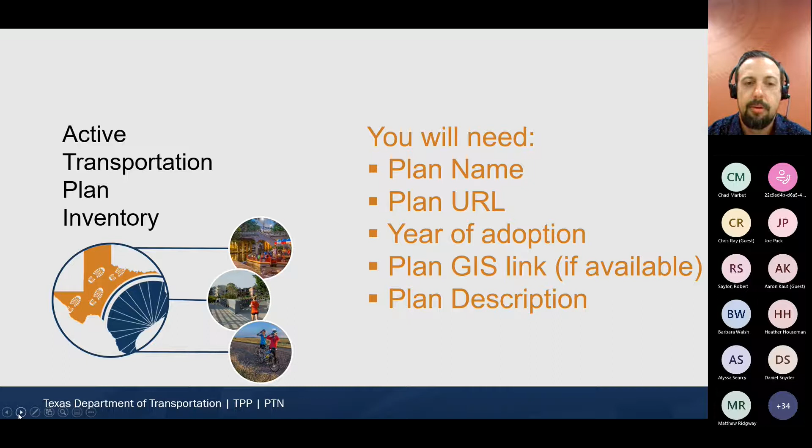All right, moving on to our first presenter. The North Texas region is home to many colleges and universities, both big and small, and they are important trip generators to the communities served by members of BPAC. How can colleges and universities improve bicycling and walking on campus, and how can agencies partner with them to coordinate active transportation to the campus? The first presentation will be provided by Gary Koch and Ian Siemens with the University of Texas at Dallas, which is located in Richardson. All right, turn it over to y'all.

Hello, thank you for having me. My name is Gary Koch. I'm the Director of Sustainability at UT Dallas, and my role here is to really set the stage for Ian, who is an eco rep in the Office of Sustainability, and is our leader for our bicycle-friendly university efforts at UTD.

To set the stage, though, I'd like to briefly define sustainability and what that means in higher education. Our office's scope of work is operational, so we report through facilities and economic development. That gives us some direct influence over infrastructure related to cycling and pedestrians. But our scope of work is also academic.

We work with the provost office on curriculum, research office for research, student affairs for student engagement. We have several roles as leaders in our community for sustainability. And then we work with faculty for our sustainability committee on policy issues.

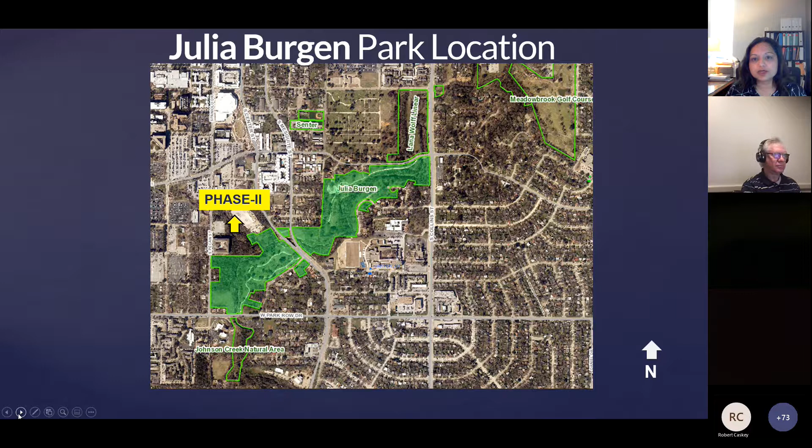Our long-term goal was to provide an enhanced hike and bikeway system that would extend along Johnson Creek Linear Park, but also draw connections into adjacent residential neighborhoods and the university campus, allowing students and staff an alternative mode of transportation while also providing recreational opportunities.

This is a park master plan, and we had to phase it into multiple phases. Phase 1 development included building a parking lot in the center of the graphic, with a playground area for multiple age groups, ages 2 through 5 and 5 through 12, several benches, a pavilion, drinking fountain, and bike rack. A portion of the hike and bike trail system was also developed as part of phase 1.

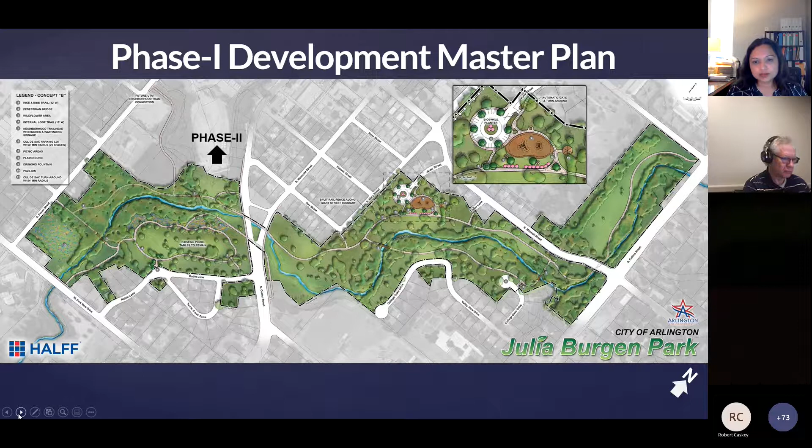During phase 1 development, we were able to construct connections into and connecting to the existing sidewalk system, making it really easy for people to walk to the park if they wanted to. In places where sidewalks were missing, we did a separate program through our Public Works Department, incorporating additional sidewalk connections so people could walk to and connect with the park system here. Next slide, please.

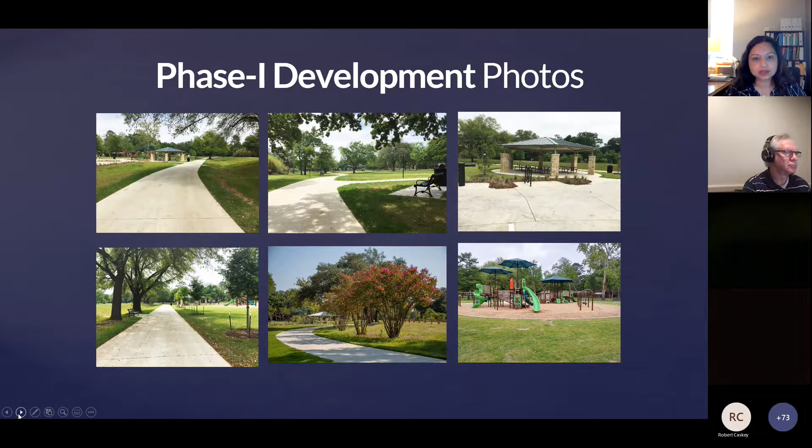Now I want to talk about phase 2 development, which is what we are currently executing. Phase 1 completed significant portions of the trail system, but we still had a few other sections that remain to be completed.

While we were in the design process, we discovered that there were several portions within the park boundary that were designated as ecosystem restoration areas. We did not want to disturb the natural habitat, wildlife, and ecosystems within those park regions. So we had to think about alternative solutions to continue providing our off-street bikeway, hike and bike pathway connections that we had originally planned in the master plan.

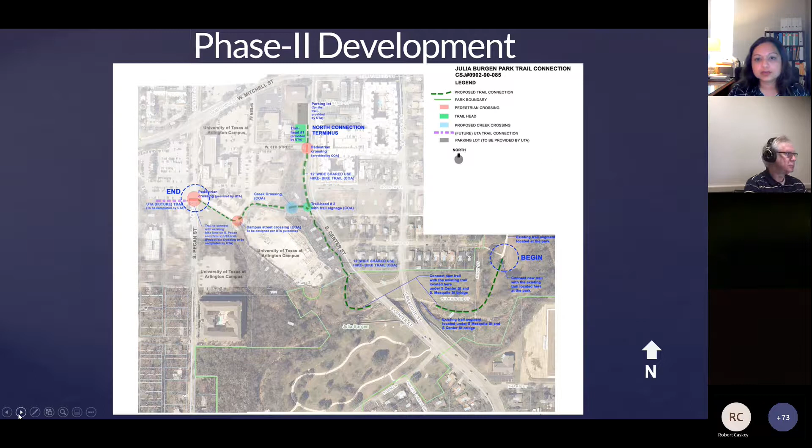So that gives you a quick outline of where we are at. This project is funded through a TAP grant, and we've been working diligently with COG and TxDOT to continue moving this project forward. We are at 90% engineering and design, and we've achieved environmental clearance on this project. There are some utilities and right-of-way clearances we're currently working on, anticipating completing those this fall, and also looking at letting the project in December or early next year.

That would allow us to begin construction sometime in spring next year, running through an anticipated 1-year-long project. Once complete, that would allow us to connect significant portions of not only the linear park trail system, but also allow the parks to be connected—linking residential areas, the campus, and the existing bike lane on South Pecan Street, which would be a major accomplishment as part of this master plan development.

As I mentioned, we are now in our last phase of completing the easement acquisition efforts with the University of Texas at Arlington to complete this, and we are continuing and very hopeful that we can make this happen within the next few weeks. Having said that, next slide, please. I'm open to any questions.

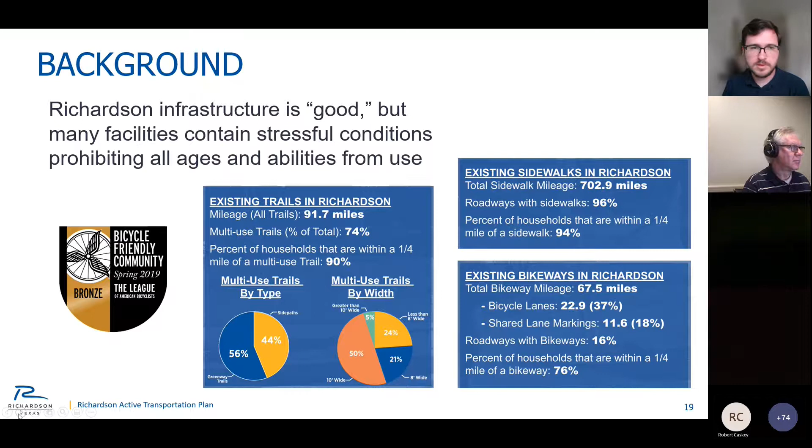It's about a 1-year schedule for us, where the goal is by the end of this year, maybe early January, we'll be able to wrap up with a final report and go to council. So we have a little ways to go, but a lot of progress so far.

We have a lot of public engagement and surveys and events coming up this month for Bike Month, and then we'll kind of wrap that up beginning of June.

Going into some of that needs analysis, we have a few different pieces where Toole Design is really running a lot of our analysis components. One of them is trip potential, and they've been looking at our residential areas and how they connect to parks and schools, transit facilities, and retail.

One thing we're really not looking at is the home-to-work trip as far as bike commuting. Our biggest focus is really looking at other things within the neighborhoods, whether it's going to school, going to parks, or connecting to our neighborhood retail and restaurants. The other focus, with the Red Line and future Silver Line coming in, is really connecting our residential areas to our major transit facilities in the city.

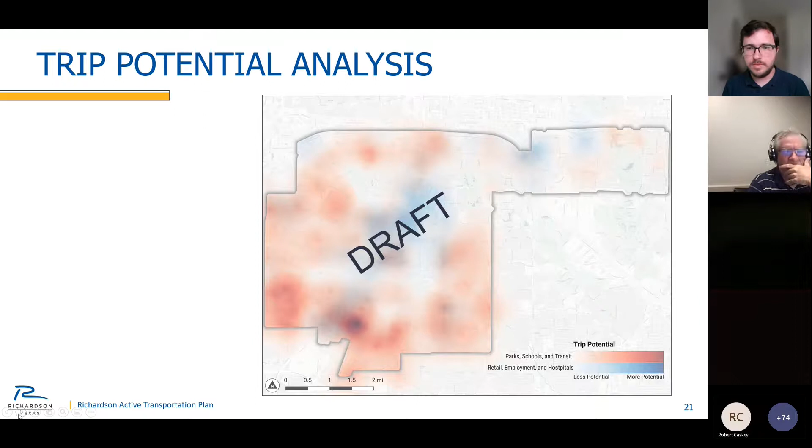Then our next analysis, on the next slide, is our pedestrian level of traffic stress. We analyzed our different crossings, whether signalized intersections, unsignalized intersections, or mid-block crossings with trails, evaluating them based on a few different measures of what's considered high stress versus low stress.

Even further, you start looking at a lot of our major arterials as major barriers, where they're all high stress crossings. We have so many six-lane arterials that you end up crossing between through lanes, left turn lanes, and right lanes, ending up crossing 7, 8, or 9 lanes to get to a signal.

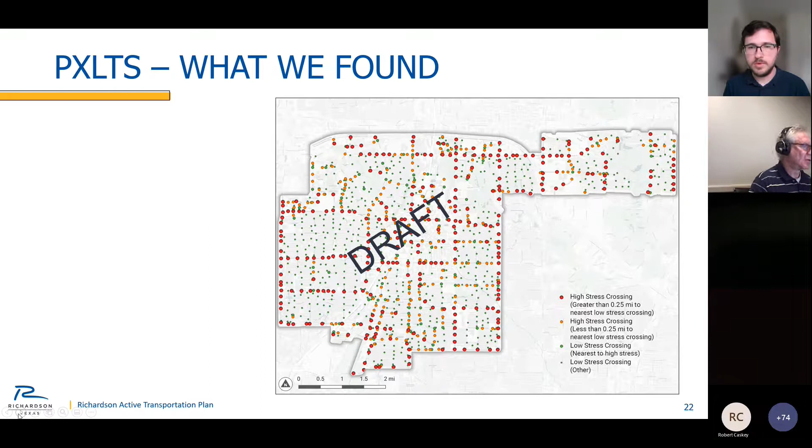So we're trying to look at where we can focus on creating low stress crossings so people aren't trapped in their neighborhoods. On the next slide, going through some analysis, you start seeing that arterial network where, north-south on Plano Road or Jupiter Road, or east-west on Campbell Road or Arapaho Road, we have large segments of the city that end up getting trapped in your one-mile arterial grid.

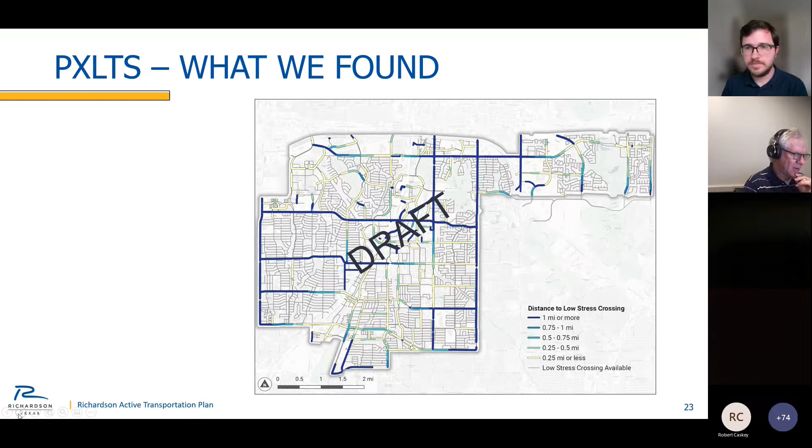This is just because there really are no comfortable, safe crossings where you think of someone with kids, or someone who's less comfortable walking or biking, getting to this area and not being able to make those crossings or feel comfortable. So that'll be another push on how we look at and find recommendations to make more comfortable crossings in the city, to really expand those boundaries so you don't just get trapped in by our arterials.

And then the next slide, we continue some of the analysis with our bicycle level of traffic stress, looking at low stress versus high stress. The low stress, shown in blue, is all your local streets, but then in red you see those higher level, higher speed arterial facilities. So we're looking at how we can create a network of low stress bike facilities. I think that's about the end of it.

We've got one more analysis we're looking at, which is kind of an equity analysis or vulnerable population analysis. That's in draft form also, where we're trying to identify the areas we need to focus on with additional consideration as well as outreach. It's an area the city hasn't looked at in the past quite as much, but we're trying to figure out how we can integrate that into this plan, creating facilities for everyone.

I think we may have a few minutes, a minute or two, for questions if anyone has anything.

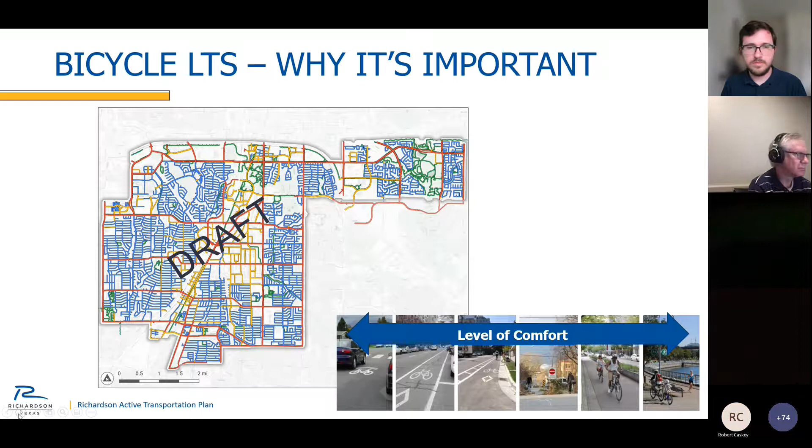Next up, the Association of Pedestrian and Bicycle Professionals, or APBP, is a professional organization focused on advancing active transportation through policy, design, and education among members. Continuing with the next presentation, we have Daniel Herrig and Brendan Yarbrough with Kimley Horn.

Thanks, Robert. I'll continue here, and then hand it over to Brendan. As he and I have both mentioned, we're both members nationally of the Association of Pedestrian Bicycle Professionals, but within North Texas, the DFW area, there's no local chapter—even within Texas, there's not a local chapter. So the discussion is to see if there's interest in continuing this regional BPAC conversation into an APBP DFW chapter, where anyone interested in walking and biking can further that discussion.

If you go to the next slide, the objective of APBP is making walkable and bikeable places—sharing knowledge and expertise throughout the environment. From DFW, we have a lot of things we may not be able to do like Portland, or the West Coast, or East Coast can. I think we have a different context here, so it'd be great to get feedback and conversation from people in the region, as well as across expertise—planning, engineering, urban design, landscape architecture, public health, advocates—getting everyone in there to have conversations and share lessons learned.

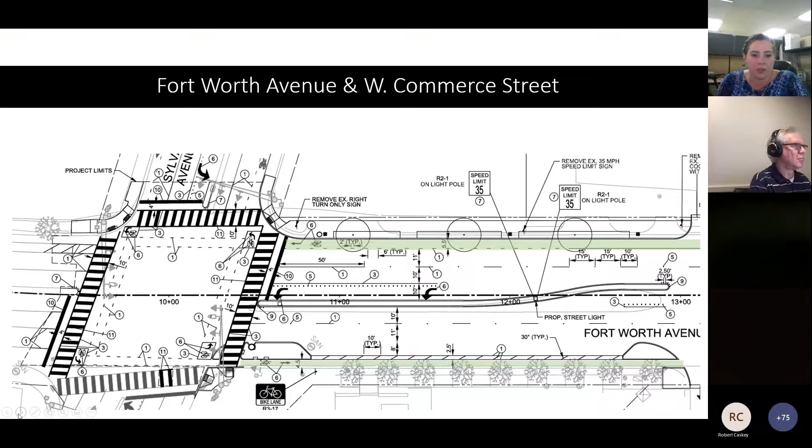The bump outs include rain gardens or vegetated areas that differ throughout the corridor. Right here is a rain garden, and there's actually inlets just further cut off in the picture. This one you're seeing here is a rain garden that filters water, along with all those great low impact development features. One thing I do want to say is that we've had pretty good compliance with vehicles remaining in the parking lane and not crossing over into the bike lane. In this section, we have enough space to have that buffer between the car and the bike lane.

So this section is really comfortable to ride and seemingly usable by the community. To the right in the picture is a shopping area, so these are people not only that live in the community and know how to use it, but guests and visitors who have never really been here before. Seems pretty intuitive, so we'll call that a win. Something we have identified is the need for maintenance agreements to be very clearly outlined from the beginning. We're fortunate with this project to have champions, which actually got this project into the bond back in '17, but we really need to make sure those maintenance agreements are in place so these places can stay looking beautiful as intended.

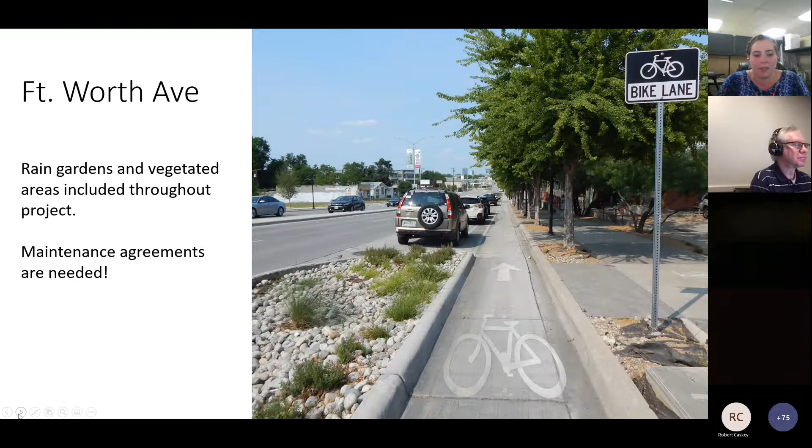Here's another angle of that exact intersection. We do have that kind of more protected crosswalk and the bike lane that's continuous, like I said, to the west or left in this picture.

This project did not go in completely smoothly. Of course, we had to run into some problems. In this location, we were limited with our right-of-way. The project limits actually stopped at a match line in the plan set, so we didn't get all the way to the next block and end seamlessly. On the left side of this picture, which is really the north side of the project, that development will be redeveloped, which would give us the opportunity in the future to actually fully adjust the median that is currently in the middle of the street.

As you can see here, we had to do some field engineering, and really there's no buffer space between where the cars can park and the bike lane. So in the future, we're looking to push this out and give actual space to the cyclists. You can still bike through this corridor, even with large trucks and their big dually mirrors hanging out into the bike lane. It's still passable, but can be improved in the future.

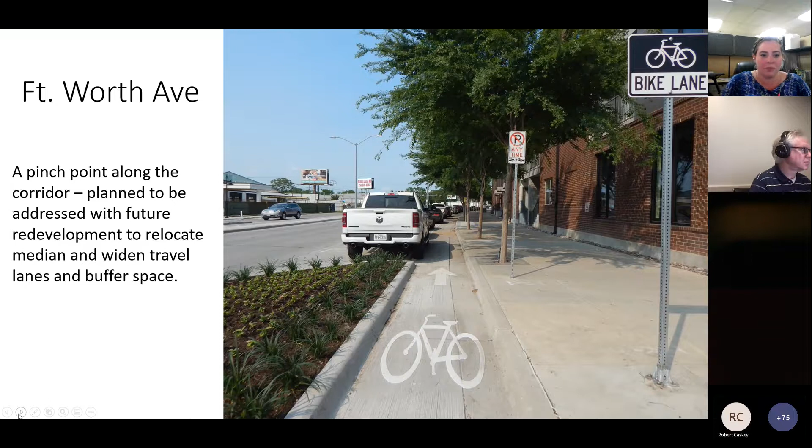That bump out you saw is maintained by the apartment complex adjacent to it, so a couple of the locations are being maintained actively by nearby property owners. As we continue down the street, it really opens up, and we're just using the flex posts in the buffer space for the bike lane.

At the intersection of Beckley, this is another location where it's crossing existing facilities. Those are bike lanes and cycle tracks on Beckley. We installed the green turn box, or bike box, to help cyclists go left or right, north or south, whatever direction they want to go.

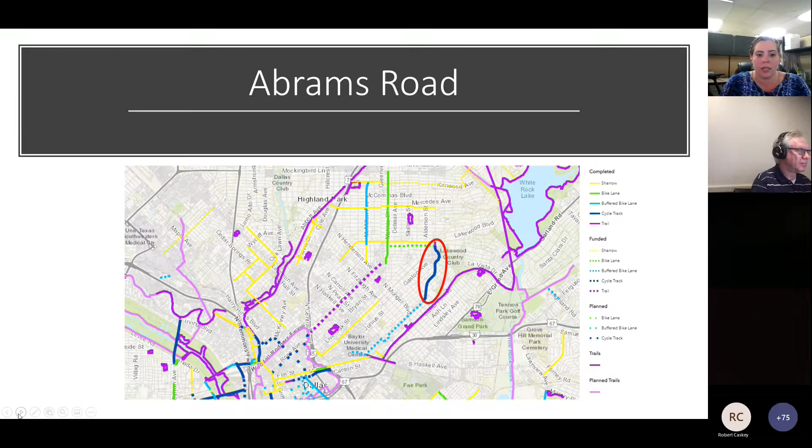Switching gears over to Abrams Road, this is in East Dallas near White Rock Lake. As you can see on the map, the yellow is completed sharrows, the dashed green is that future bike lane project I was talking about. On the south side of this project, that is the main Columbia section of this corridor that is being designed currently.

This was a 6-lane with sharrows turned into a 4-lane with bike facilities. The bike facilities on this corridor switched about halfway through. On the northern end of the project, we have a 2-way cycle track, and on the southern end, we have directional bike facilities with a buffer space.

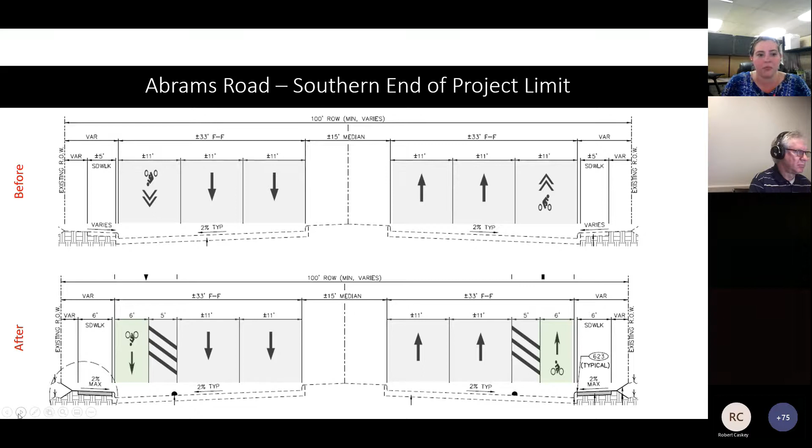A difficulty in changing the facility type in the middle of the corridor is not only the usability to cyclists, whether they live there or are visiting, since it's easier to stay on a continuous facility, but also when facilities switch and meander or change at the intersection, you have to understand the extra infrastructure needed. Switching to or running a 2-way cycle track through a signalized intersection requires bicycle signals, and signals were not included in bond projects. So we had to procure additional funding for bike signals, which are still not installed, but will be very shortly in the future.

Additional things we've done to this project after construction is adding additional flex posts to the concrete barriers that were installed as part of the project. The white ones on the concrete island, and the yellow in the center line.

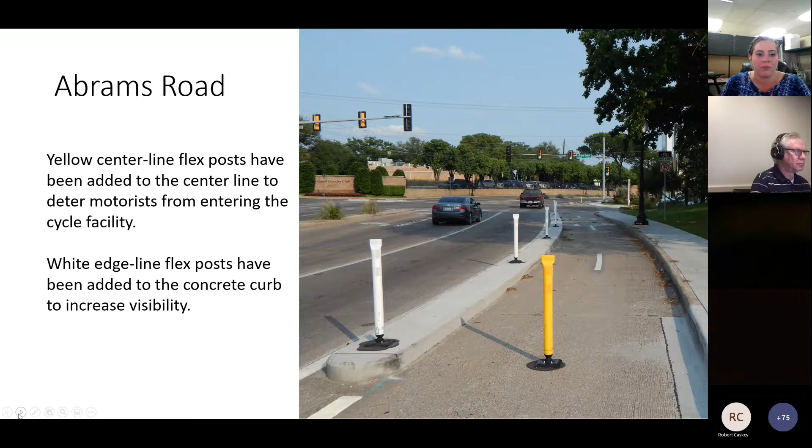On the southern end of the project is directional bicycle facilities. I wanted to highlight this device we've used successfully. Abrams Road's speed limit is 30, but folks tend to travel a bit faster; hopefully we're seeing slower speeds with this road diet project. This device is from Traffic Logix, their cycle lane separator. It has stood up to vehicles running over it. Our only concern is the white reflective strip on top wears rather quickly, but we'll take that required maintenance over these dislodging from the roadway and becoming a hazard.

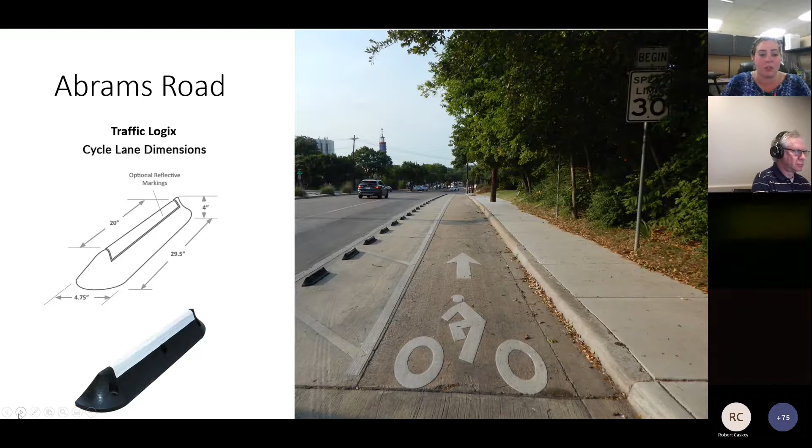So we've really enjoyed these delineators.

A learning point from this project is we'd like to do our bus stops in bike lanes a little differently. We're updating our bike plan right now, and it seems a couple of us in the region are doing so, hoping to identify updated design standards so we can keep the bike lane continuous and provide a safe connection from the curb all the way to the bus, which would hopefully stop in the regular travel lane. Hoping to see those standards identified through the bike lane update.

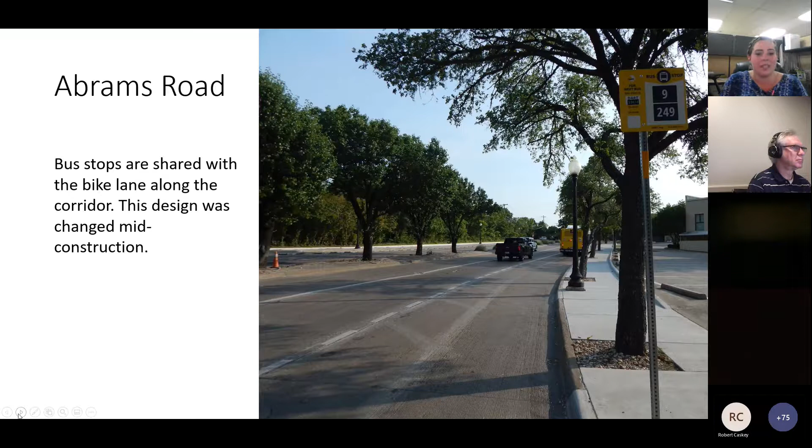I see a question in the chat: someone asked about maintaining a parking-protected configuration without a buffer.

Yes, it is a challenge. With limited space, it was field engineering—realizing the curb was not moving as the plans identified. Once they were out there and realized this was a choke point, the question was what to do. The option was either close the bike lane or install it, knowing the area around it will redevelop and we can move it in the future to give more space, hopefully avoiding conflict with a door zone.

On speed, I'm not sure the top speed the Traffic Logix separators are rated for, but they have those specifications on their website. Also, we've updated our domain names for our email addresses—we're officially dallas.gov now. That covers Transportation Department and Public Works.

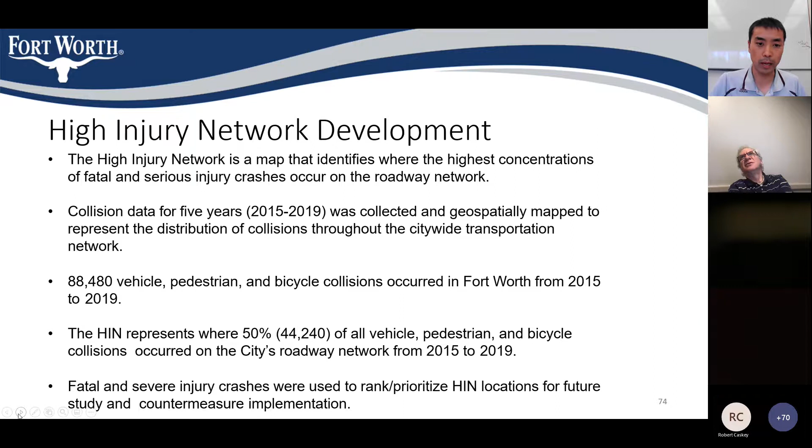This 50% threshold was based on what other cities have done. There was no standard threshold for a high injury network, but that's what we went with, and the crash data came from CRIS. This was to make sure our resources were being used effectively, but also that we want to be equitable. I'll go over that in the next slide.

This is our map of our all-modes high injury network. From 2015 to 2019, a quarter of the fatalities and serious injuries occurred on a little over 3% of our city's network.

79% of the high injury network fell or was adjacent to supermajority minority areas, or SMMAs, meaning that 75% of that area, I think by zip code, is a minority population. SMMAs accounted for 95% of all fatalities, but more critically, all of the pedestrian and bicycle fatalities on our high injury network occurred within a super MMA.

Our high injury network will help us target locations to be more equitable, and also allow us to perform larger countermeasures. Many times if a citizen complaint raises an issue, we would try to do something with either signs or markings, but hopefully our goal is to do more long-term things.

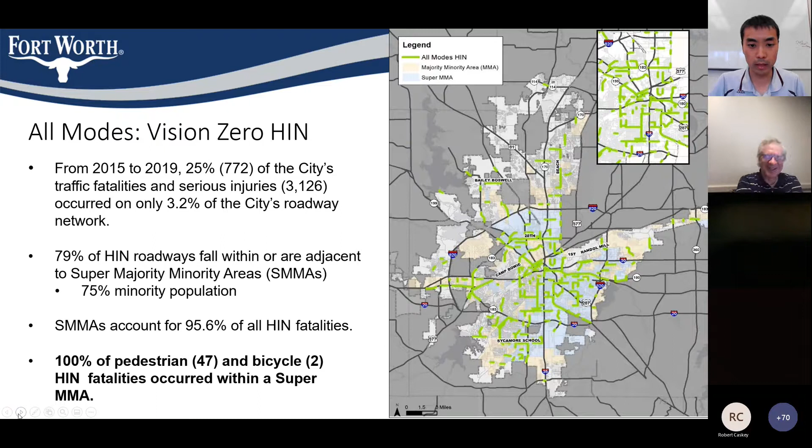If you look on this map, the MMAs, which is 50%, are in the tan yellow, and the SMMAs are in blue. A lot of it's skewed towards the south, but also around the city, it's spread out everywhere.

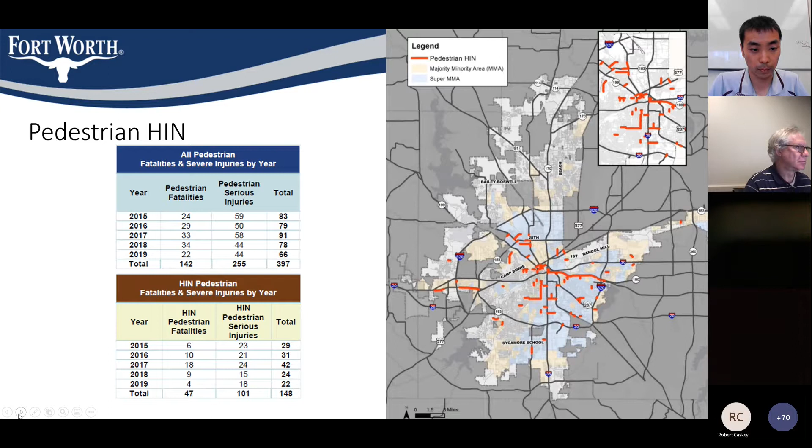This is the same, but for bicycle high injury network. In 2020 there was 1 fatality and 6 severe injuries, which kind of keeps the trend of what we've seen in the past.

On the map, I think it's spread out with the bicycle high injury network, and I think that's expected since there's not too many bikers, so one fatality really is a big hit. But it also, I think, skews towards the south, which is more the older MMA neighborhoods.

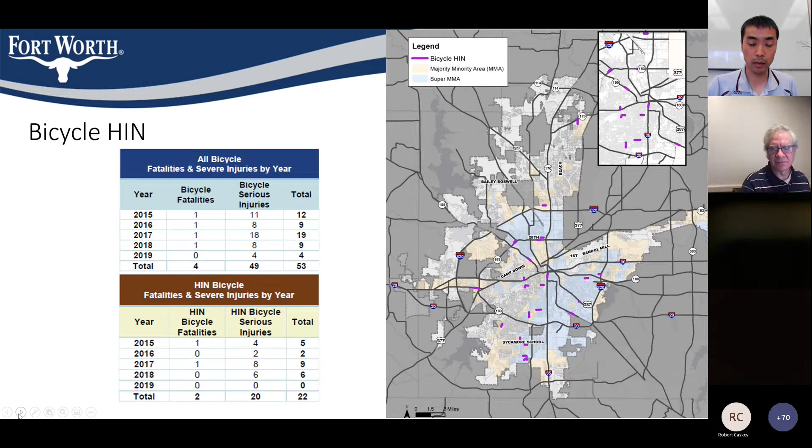From our high injury network, we chose the top 10 locations for bike, pedestrian, and vehicles. This map shows all of them, but I've listed off the bicycle and pedestrian ones. To help choose these locations, this was based on crash density and the number of fatal collisions, and this will help us prioritize our efforts.

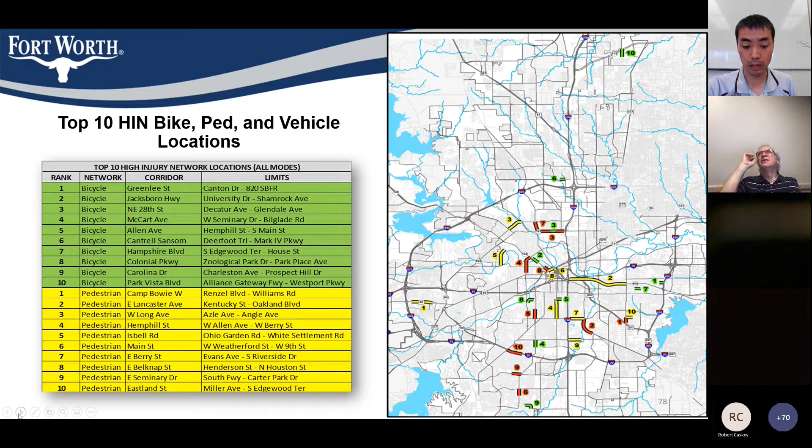With our top 10 locations, we performed some roadway safety assessments. A roadway safety assessment is a field-based evaluation of a roadway used to identify roadway features that may pose a safety issue, along with countermeasures. We then implement such countermeasures to mitigate these concerns.

Last year, RSAs were performed for 8 of the top 10 Vision Zero high injury network locations with the consultant, covering all vehicle, pedestrian, and bicycle concerns. An additional RSA was also performed with FHWA and NCTCOG through their regional pedestrian safety action plan, and shout out to Millie Hayes and Julie Anderson who helped us with that.

With these assessments, we're going to take these and try to implement the countermeasures. If you go back to the previous slide, that'll list the ones that we did.

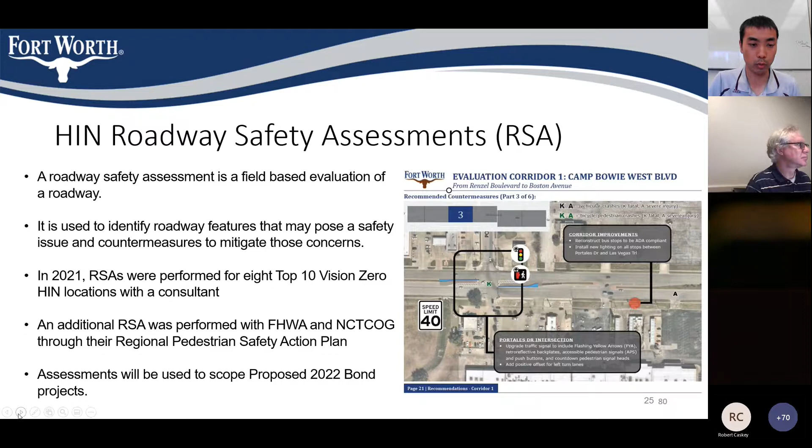We did Camp Bowie, which is a major 6-lane undivided road, Isbell, Long Avenue, and then Eastland with 4 pedestrian locations, and Belknap, which we did with FHWA and NCTCOG, and then Allen Avenue, which is south of downtown near hospitals. They added bike lanes a few years ago, so we wanted to go through and do an assessment of those.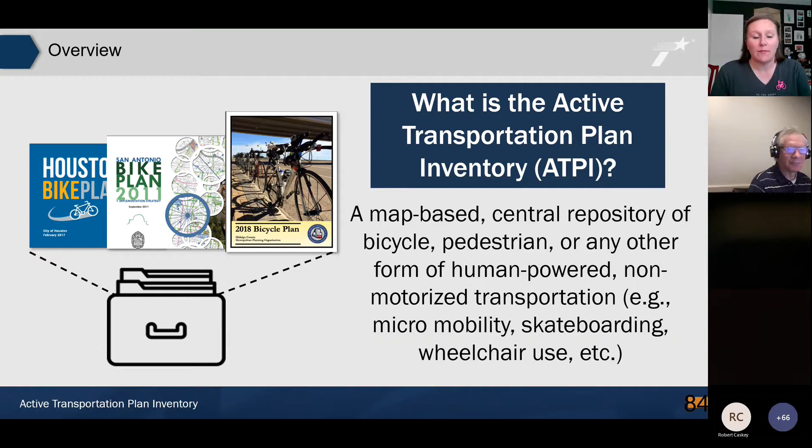As a quick overview, the Active Transportation Plan Inventory, or ATPI, is a map-based inventory of bike and pedestrian-related transportation plans that are published by planning entities across the state.

So the goals of the ATPI are to provide a centralized inventory of active transportation plans across Texas, enable easy access to these plans by engineers, planners, and the public, increase collaboration, and hopefully facilitate development of safe bike and pedestrian networks across Texas.

So why should you participate in this inventory and submit yours? Well, there are many reasons, such as having access to examples of plans, goals, actions, or even performance measures of peer cities. You can benchmark yourself against your peer cities. It increases our statewide collaboration, which all leads to a better active transportation network here in North Texas.

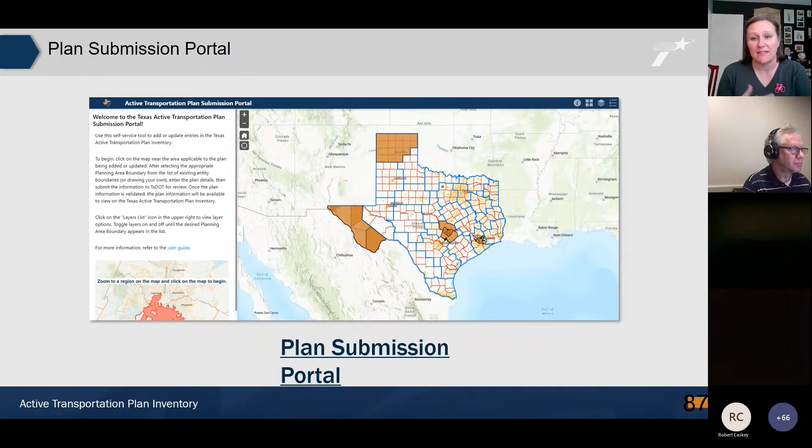So hopefully you guys have been able to get your plans ready and submit them today. I'm going to demonstrate a plan submission right now for the City of Denton. They've just adopted their mobility plan. Barb, I am going to take over the screen now, and in the chat, Daniel will add a link to this submission portal, which I'm going to show on my screen right now.

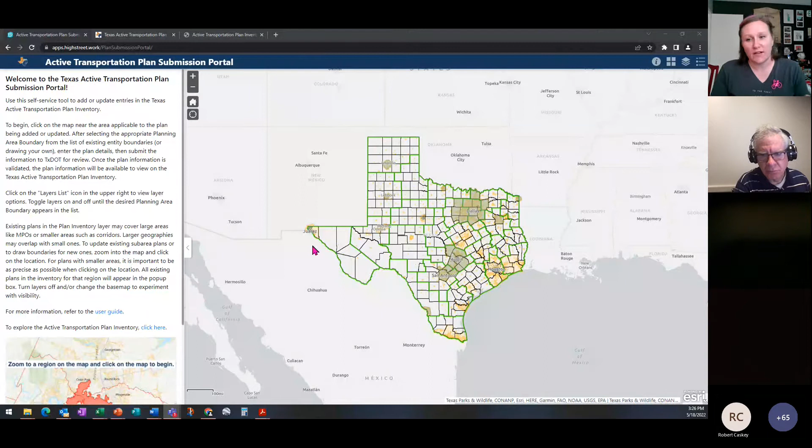So over here, when you click on the link, you get taken to this page of the Active Transportation Plan Submission Portal. You're going to first zoom in to what your city is. So we're doing Denton today. If you zoom into Denton and then click on it, it's going to pop up that you can update an existing plan that's already there.

So you can see I've updated the COGS Pedestrian Safety Action Plan and Mobility 2045. So today we're going to put in Denton's plan. You've got options for where you've zoomed into on the map, for Dallas District, Denton County, City of Denton, or the COG MPO. So we're doing Denton today. So I'm going to click on Denton. And then Denton right here gets highlighted.

And then over here on the left side of the screen is where I'm going to enter this information. I've checked this info with Nathan in Denton to make sure it's all correct. I'm doing this on his behalf so we could do it here in front of you guys today, and hopefully you all are going to do it as well. So you've got your entity name, City of Denton, already pre-populated from when you clicked on it on the other screen. Which department is in charge of this plan? In Denton, it's Capital Projects Engineering.

Okay, and then contact information. Here we're going to put Nathan for the contact, since he's the active transportation contact for the City of Denton, and his email. And then your phone number, so if anybody needed to contact you.

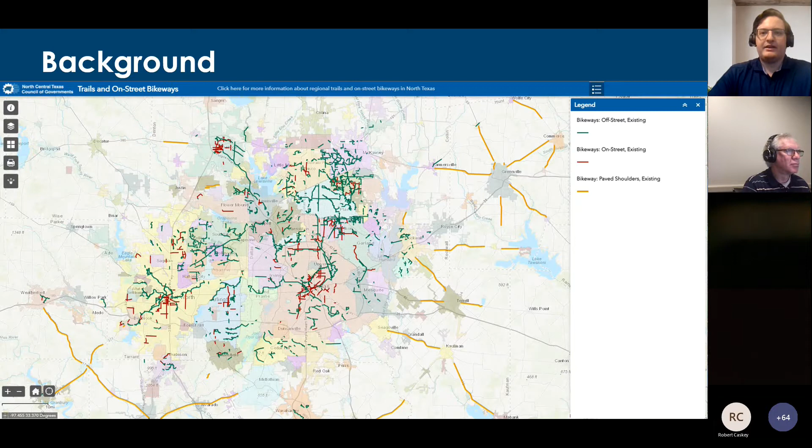We also use these plans in our metropolitan transportation plan, the MTP 2045, which is currently being updated and hopefully formally adopted next month, actually. And we only accept locally adopted plans as well, just to make note of that. Next slide, Barb.

So last year we performed an online interactive map experience where people could make edits or suggestions. Basically anyone without a GIS license could make an edit if they had the link, adding new trail alignments, deletions, or updating trail names, that kind of stuff. We would take that feedback and update our database based off of it. That was the process we used last year. Next slide, Barb.

So now we've got a new process we're considering using, which is essentially a GIS checkout process utilized for your ArcGIS desktop or ArcGIS Pro if you have that.

Essentially what happens is you send us an email saying you want to check out our data, and we provide you a zip file with the necessary information and ArcMap, and you get a copy of our database. You make edits just like you would usually do in GIS, the same usual way you've always done. Once you're done making those edits, you zip the file and send it right back to us. That's how it works. It does require a GIS license.

Some of the pros of this is that the alignments could be more accurate because you're using GIS spatial information instead of just clicking dots on a map. You'll also be faster if you're making a lot of edits. Hopefully you're not making a lot, just none or one or two, but if you do end up having to make a lot of edits, this would be the faster way to do it. This is one of the edit processes we're considering. Next slide, Barb.

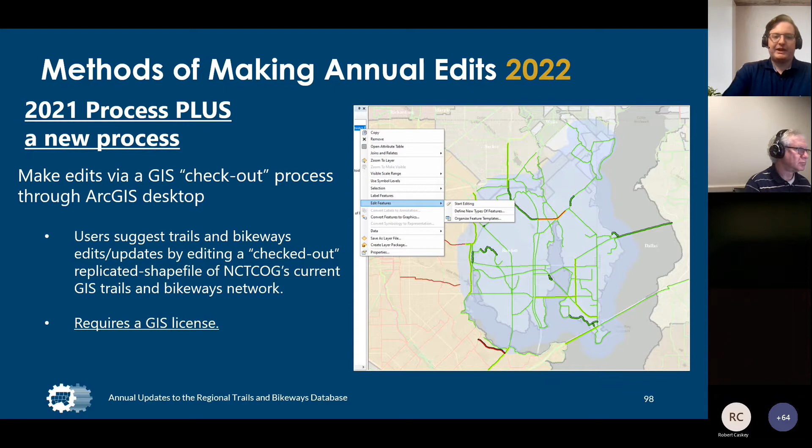Before we could even do that, we want to do a survey with y'all to see which one would be better. Would you like the non-GIS license approach with the online interactive map, or would you like a more GIS dedicated software that could maybe be faster or more accurate for y'all?

So Julie dropped a link in the chat, thank you for that, but you can also scan with the QR code. It's literally just two questions, so you can actually do it right now if you'd like.

I'm going to open mine up. I see we're already getting new responses, that's awesome, thank y'all for doing that. Again, you can still fill this out later today if you want to. I know we're shorter on time, so if you want to go to the next slide, Barb, please.

So next steps, we're going to be looking at the survey results and want to get a kind of read on what people's preferences are, what everyone wants to do, and take that into consideration. Then we're going to refine the process, whatever we pick, for the August BPAC before we send it to y'all. We're going to start our heavy data collection in the August-November timeframe and try to update our online maps as well.

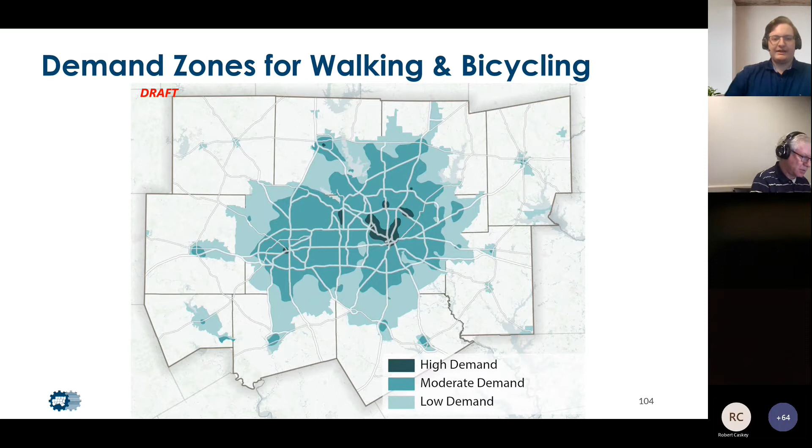One of the reasons we want this demand zones model is to help understand where we should prioritize our funding dollars, because we only have so much money to give, and there's so much being planned. For instance, our planned regional Veloweb, the regional trail corridors across the 12-county MPO region, has almost 1,500 miles planned right now. We can't fund all of it, and we can't refund 5% every year in the coming years. So we need to be very specific and strategic in how we fund these regional transportation infrastructure trails.

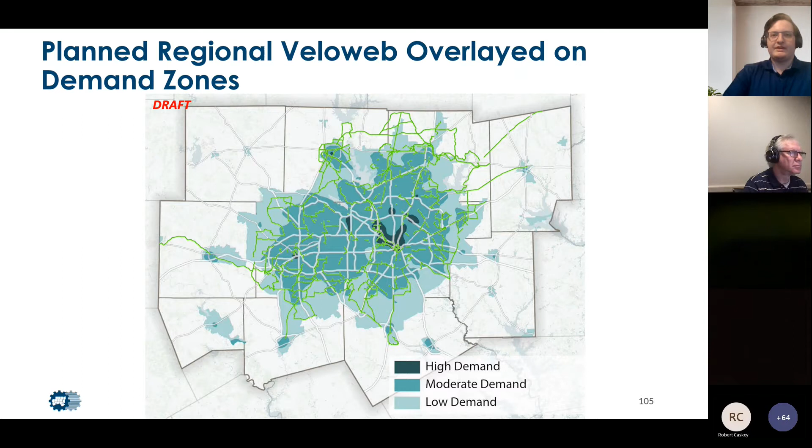In the Mobility 2045 update, we created focus areas for improving facilities for accessibility. These focus areas include public transportation facilities, that's rail and bus transit, destination density like high mixed use or TODs, employment centers, and neighborhood services or local community centers as well. We want to focus on that.

We also want to address travel barriers such as major roadways, railroads, or bodies of water, which aren't really safe to cross for people, or people can't cross at all. So we want to create safe crossings across the region. We also want to help support neighborhoods that have been historically or currently transit dependent populations, focus on areas of high bike ped safety concerns and high rates of crashes, and support infrastructure that has been highlighted as both regionally significant and significant in the state transportation network, such as TxDOT's bicycle tourism trail study, which highlighted both of these.

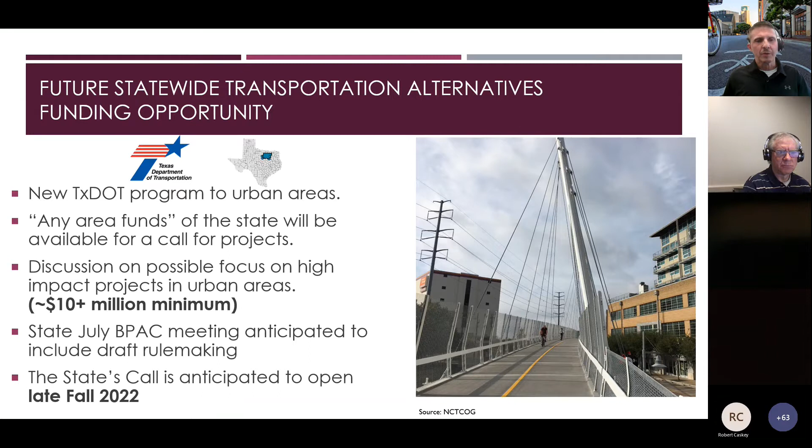The state's currently working on the program rules and rulemaking for this upcoming call. That's about all we know right now. But Carla anticipates that at the July meeting of the state's committee, they will know more information, and we'll be able to pass that on to you later this fall. It's anticipated, at least at this point, that the call will open in fall of '22. We also understand that the state is likely going to send out a survey to local government representatives just to gauge the potential for you all to submit projects in this call.

So if you wouldn't mind, this is definitely an opportunity where we might be able to partner with you. Please reach out to us, let us know what you're thinking about possibly submitting in this big mega project type call with the state. There may be an opportunity that we can work with you on helping formulate some of those application ideas or materials that you submit to the state. That's basically all that we know, but it's a really great opportunity - we think there could be some really substantial projects potentially funded in our region through this funding available through the state.

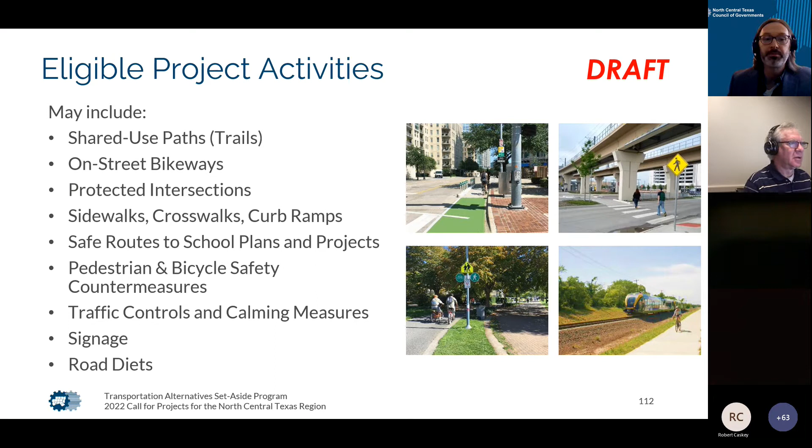The number of application categories is proposed to be increased. Previously we had just the active transportation and safe routes to school categories. However, we'll be including safe routes to transit and a safety category as well. For each application category, they will have their own unique evaluation criteria, so it will be really important when we publish the materials to review the criteria for each category to determine which category would be best for your project. If you have any questions, feel free to reach out to us. However, the category you submit under is the applicant's decision.

Let's talk about some changes to these categories as well. Safe Routes to School - these are improvements within a 2-mile radius of schools that facilitate travel to and from school for children. And new for this call, we are proposing to include Safe Routes to School plans and education materials for this category.

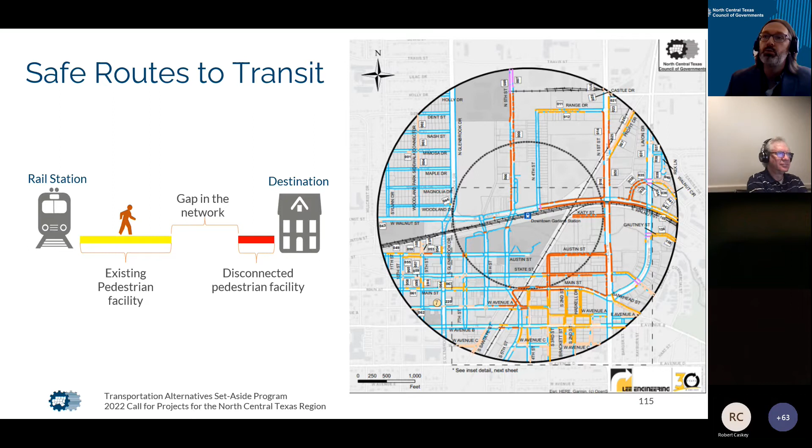The first new category we are proposing is safe routes to transit. As you all know, we have a really robust transit network in our region. However, there are gaps that still remain for pedestrians in the sidewalk network that prevent people from accessing those transit stations. So this category accommodates that - its structure is similar to safe routes to school, but anchored around transit centers.

Eligible project sponsors - this is not proposed to be any change there. If you are a local government or transit authority, school district, you are all eligible to apply. If you are with an entity that you're unsure if you're eligible, feel free to reach out to me and we can discuss and make that determination.

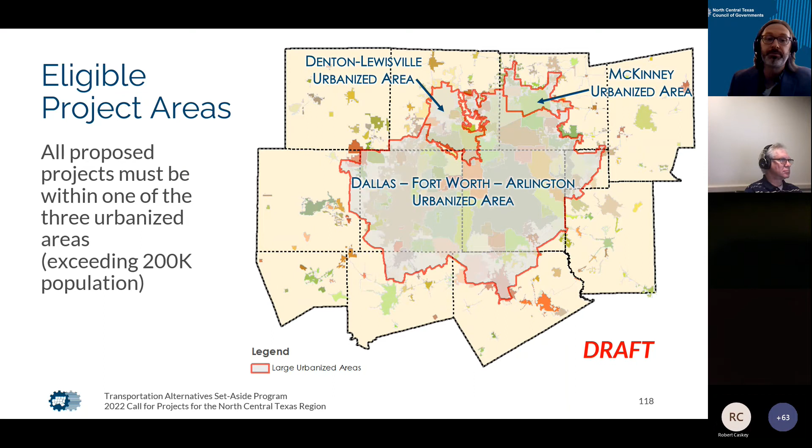Good news is approximately $40 million in federal funding is anticipated for this next call, which is actually more than we've had available in the past, which is all thanks to the increase to the TA program under the bipartisan infrastructure law.

A few notable changes for the next call for projects are the minimum and maximum awards. So previously we had a minimum funding award of $300,000. We are proposing to increase that to $500,000. However, that is only for construction related projects. We are exploring the idea to have a different minimum for Safe Routes to School plans and education campaigns.

For those of you that are really ambitious with your projects and have some ambitious ideas, you'll be happy to know that our maximum award for a project is proposed to have no limit at all whatsoever. And with that, next slide, please, Barb.

So overall, we're taking this information and sharing it with you to get you prepared for our next call for projects. We want everyone to start thinking about their candidates, what they can do now to prepare for the call.

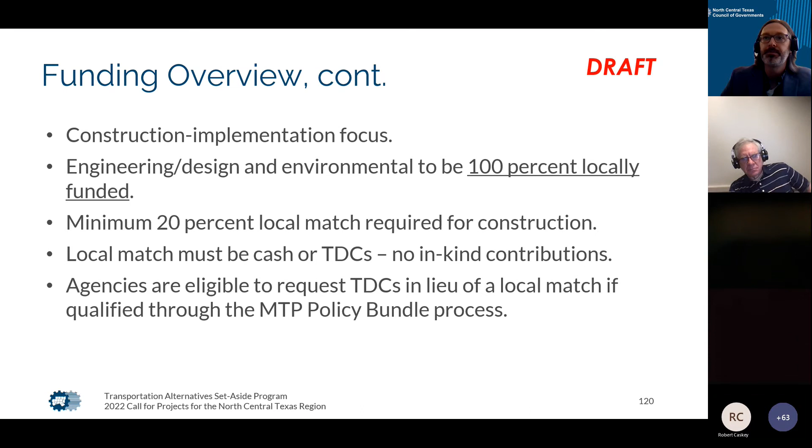We will hold a public workshop shortly thereafter. We are thinking about doing it virtually and recording it for those that are unable to attend. And with that, the call for projects is proposed to close September 9th, which is Friday at 5 p.m., not a minute later. We're very strict on making sure applications are submitted on time. So please don't wait till the last minute.

And after those submittals, we'll do a staff evaluation. And for that final milestone, we'll be taking the list of recommended projects to the RTC in December of '22 at the end of the year.

I think I've seen some activity on this side. Transit authorities will be eligible, Tim, of course. Yep, just as in the past.